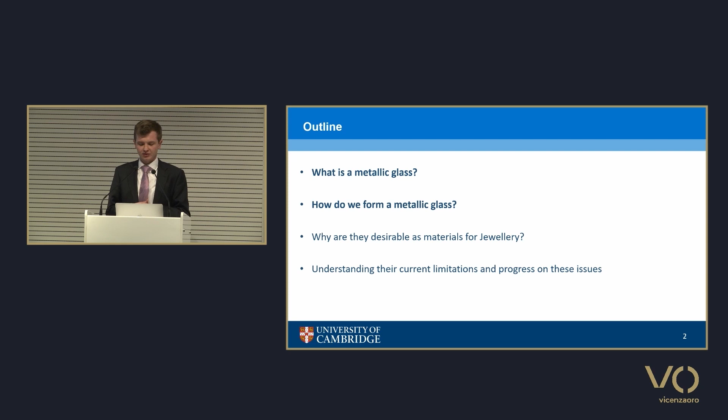So we will first discuss the nature of bulk metallic glasses, building a little on Ulrich's kind introduction, and how they differ from crystalline materials. We will then discuss how metallic glasses can be formed. After this, we will discuss the advantages and desirable properties of bulk metallic glasses as jewellery materials and how they have the potential to deliver new opportunities. And lastly, we will discuss some of the current limitations and challenges facing bulk metallic glasses as jewellery materials and what recent work has been done and what work is currently underway.

As you all know by now, metallic alloys are typically crystalline. That is, all the atoms are arranged periodically throughout space, and we have something called long-range order. By contrast, a glass can basically be described as a hardened, cooled liquid. It has the structure of a liquid, but the resistance to deformation of a solid. It therefore differs substantially from conventional crystalline jewellery alloys. While it's tempting to draw comparisons between metallic glasses and polymers and oxide glasses, such as window glass and silica, we need to be careful because in those structures we have chains of atoms which are entangled together, which is not the case in metallic glasses. It's the atoms that are randomly distributed.

So when we form a metallic glass, we take it from the liquid state and we want to cool it very quickly to avoid crystallization. We can measure these properties using what's called an isothermal time-temperature transformation curve, which I've measured here for one of the gold-based glasses. You'll see two red lines here. The one labeled 2 represents a critical cooling rate that will entirely form a glass. The line labeled 1 is the critical cooling rate to avoid crystallization. That intersects this black C curve, which is the measure of the time for crystallization to occur as a function of temperature. If we cool fast enough, we will reach the glass transition temperature—the temperature at which the atoms are effectively frozen into the glass and thermally arrested.

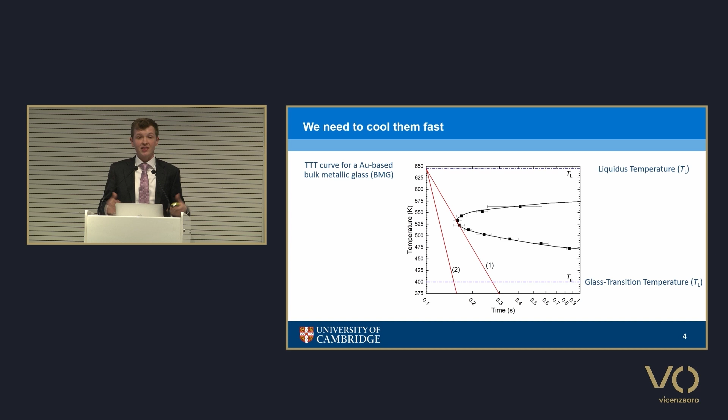So our aim from the previous slide is to push this C-curve as far to the right as possible, and we can do this by adopting several strategies in choosing our alloy. First of all, as Ulrich was saying, we typically choose eutectic compositions, where the red line intersects the blue line. That means our liquid is as stable relative to the crystal for as long as possible, so the temperature gap between here and where the glass transition would be is as small as possible.

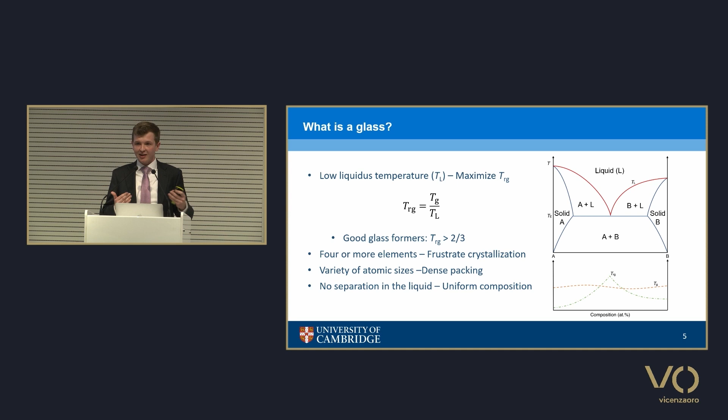Secondly, we will design our alloys with 4 or more elements. This does several things: it ensures dense packing within our liquid, so the atoms can't move around as quickly. But it also means that when it does try to crystallize, there will be many phases trying to crystallize at once, so it's a bit of a mad rush, and ultimately none will crystallize. Those atoms we choose quite carefully—our elements are chosen for varying atomic sizes, which helps promote dense packing. We also want to make sure that chemically they all like each other the same amount so that we don't get any phase separation.

So that's a very quick introduction to the principles of how we form metallic glasses. We will now go into why they are useful as jewelry materials.

Metallic glasses have been used and proposed for various applications, ranging from biomedical implants to space applications. But they're probably most famous for their use in electrical transformers, where they have very low resistance, minimal heat losses. Since the advent of platinum and gold-based glasses by Boonrat Lohwongwatana, and as Ulrich explained, those glasses have sufficient hallmarking standards for the jewellery trade.

There is a wide variety in glass forming ability. As Ulrich was saying, we have this critical casting diameter, which scales with cooling rates. We call any glass a bulk metallic glass if it can be cast in sections thicker than 1 millimeter. So here we've got all various types of metallic glasses.

As you can see, palladium's nice and high at the top, and gold is more towards the bottom. It's worth noting that there are very few silver glass forming alloys, and none of them are near the sterling silver fineness regulations.

We've got our palladium glasses up here, and then we've also got these zirconium ones. For some of you familiar with the watch trade, these zirconium-based metallic glasses have already been used under the trade name liquid metal and are often used in bezels of certain watches.

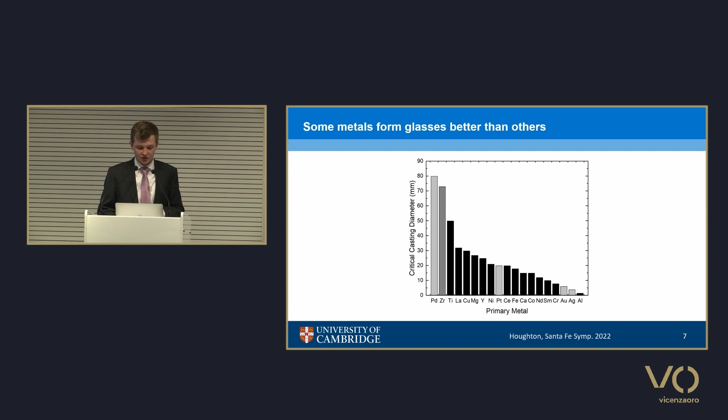One of the main advantages of BMGs is their hardness. Here we've got a chart of different metals, the crystalline alloy and a BMG of comparable fineness. And as you'll see, the hardness is typically at least twice as high. This is due to their atomic structure.

Whereas in a crystal we have layers of atoms that can slide easily over one another, they don't exist in the glass. Glass is actually deformed by a mechanism of shear banding, which I won't go into. But ultimately it means we have very high elastic strains under large loads, so we don't see macroscopic ductility in the same amount, but we do have much higher hardness.

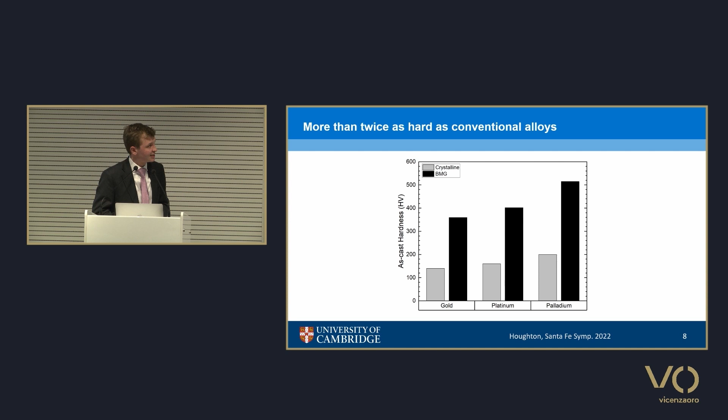Failure here will occur by the shear bands, but that occurs at much higher strains, allowing the ball to bounce as much as it does. Again, we get new design opportunities courtesy of these metallic glasses because of their high elastic properties and the fact that because they're so hard, the gems won't deform the metallic glass.

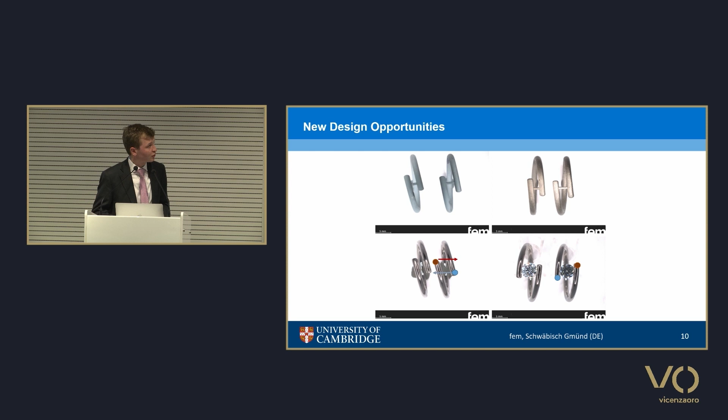In terms of processing, Ulrich talked in great detail about investment casting, but there's also this advantage that because metallic glasses are so much like polymers, there's a process very analogous to plastic injection molding. There's several companies that are able to do this, and the key advantage is time.

As you all know from Ulrich's talk, we have minimal shrinkage on casting, and we have very good surface finishes. So we can actually cast rings in a matter of seconds, as opposed to the relatively long time for investment casting.

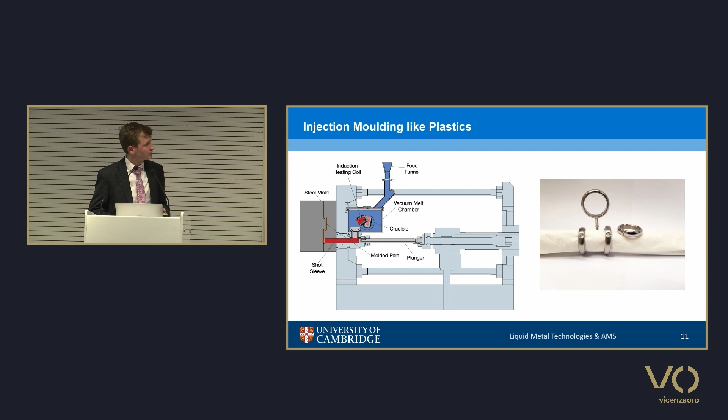So we'll now go on to the current limitations and progress on the issues. As we've already mentioned, we need extremely high cooling rates to form metallic glasses. Not only does this create issues with actually forming thick sections and forming glasses in the first place, it will also create many issues with form filling, so we have to be careful about the design of our castings.

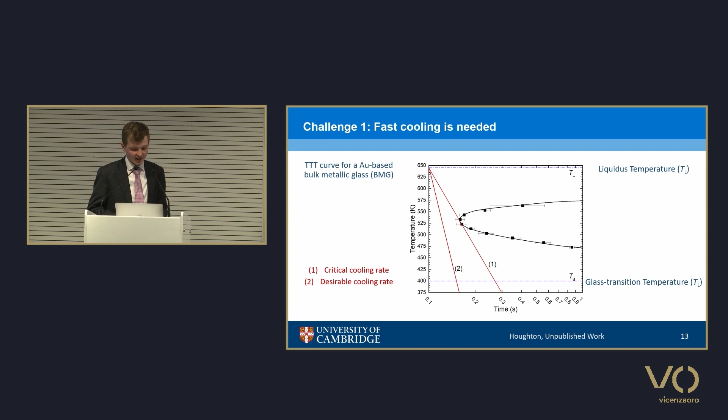But for our platinum and palladium systems, we're right at the cusp of this 950 hallmarking fineness. The large issue comes from considering that, given we need about 15 atomic percent metalloid or other additions to form a glass, we can only be using a certain range of light elements.

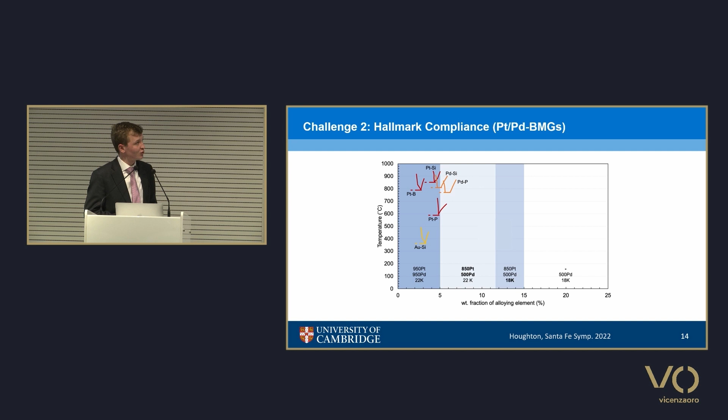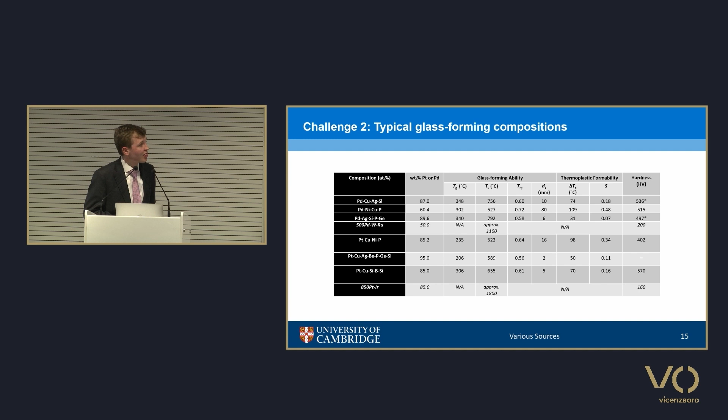I show a table, which is perhaps some of the figures you may have already seen, but you'll see that as we go to our higher finenesses in our platinum and palladium systems, we typically have an issue with critical casting diameters dropping off markedly. These ultimately mean that they're of little commercial use at the moment. We also see a drop in this thermoplastic formability, characterized by this S value here, and that's of importance for the injection molding analogs.

So we now move on to the issue that Ulrich didn't concern as much, and that's in these white gold alloys. The alloys are white in general because of their high silicon content, but unfortunately these alloys tarnish abnormally fast.

So this is a sample, a white gold ring that's just been worn for 52 days, and as you can see, there's a dramatic tarnishing phenomenon going on. Extensive work has been used to characterize these systems in general, and the tarnishing mechanism is widely understood.

When we cast these alloys in air, we generally get a crystalline silica layer that forms on top, and that is passivating and stops tarnishing from occurring. But with polishing and general wear, that surface layer gets removed, and then we see this tarnishing phenomena start to occur.

The first behavior to occur is outward diffusion of copper from within the glass, which is able to oxidize the silicon that wouldn't occur otherwise at room temperature. Ultimately that leads to structures that aren't quite dendrites—since they're not crystalline we call it dense branching morphology. In essence, we have inward oxidation of silicon and outward depletion of copper, which leads to a reddish-brown appearance on the surface.

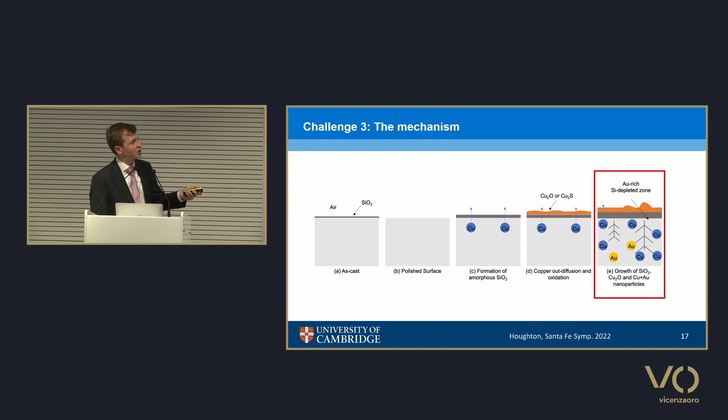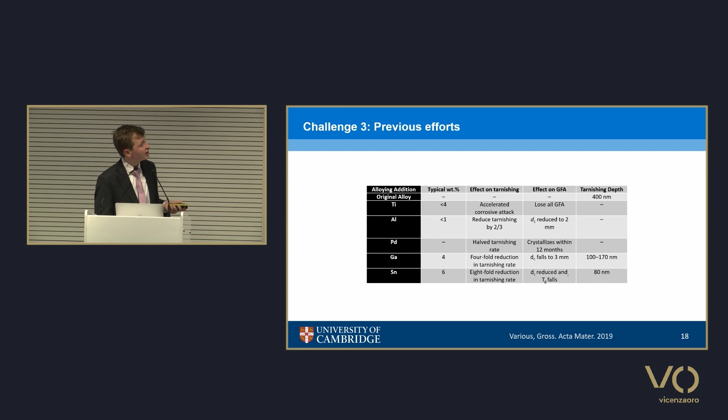So what might we do to solve this? There have been many attempts. At first, people started playing with the copper-silicon ratio and removing elements such as palladium, but that tended to lead to a loss in glass-forming ability, so we could only cast in even thinner sections than before.

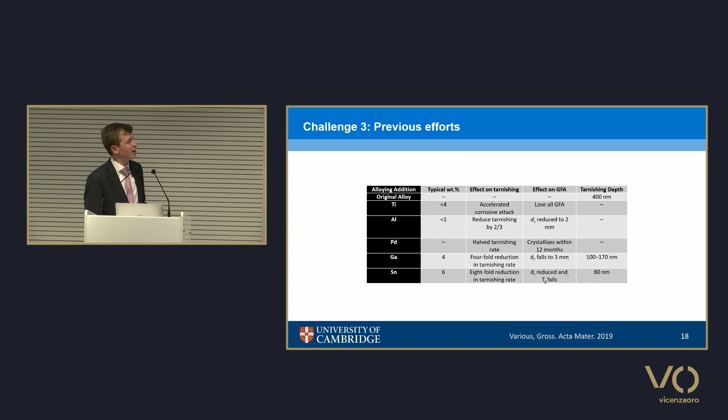People have tried adding other elements to stop the tarnishing behavior, and generally we see some improvement—this is the tarnishing depth of the corrosion scale shown schematically here. You see some improvement, but ultimately also a drop in critical casting thickness.

Perhaps the best achievement to date is by Oliver Gross and Nico Neuber. They took the Schroers alloy—sorry, that's actually their intermediate alloy—and were able to get down to tarnish scales of this value, which are much whiter than they would be otherwise.

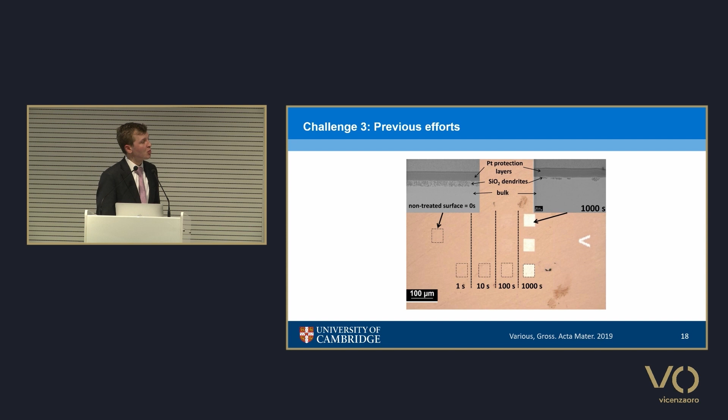But unfortunately, they had to use an effect called ion implantation, which requires a gallium ion beam and is of limited industrial use, largely because wear will remove that surface layer, and it's very difficult to do on non-flat surfaces.

During my PhD, we took a slightly different approach. Rather than working on high glass-forming alloys and improving tarnish resistance, we went right back to the start and considered all the elements in the periodic table and which ones would be glass forming, using the principles outlined before. We identified good glass forming systems and then tried to improve glass forming ability from there.

As you can see, in the Schroers alloy we have a tarnishing depth of about 400 nanometers, and in our newly developed alloys we're down to about 80 nanometers. So we're largely close to a commercially viable alloy.

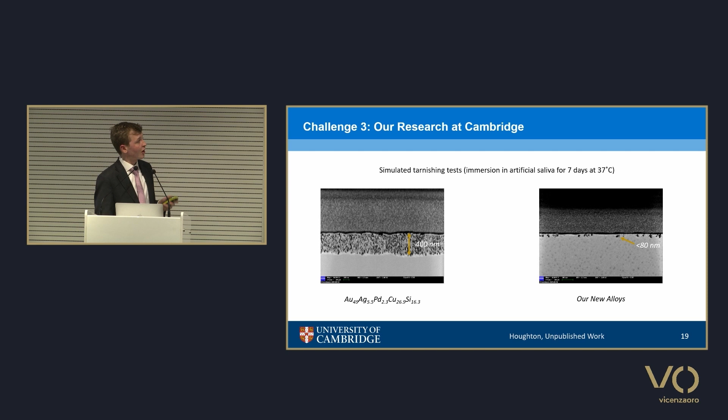Other work we're doing is in partnership with Ulrich and colleagues at FEM, looking at wear behavior. It's generally understood that wear resistance would scale with hardness—that's known as Archard's law. But in a recent publication by Ulrich and Lisa at FEM, they found that's not so much the case.

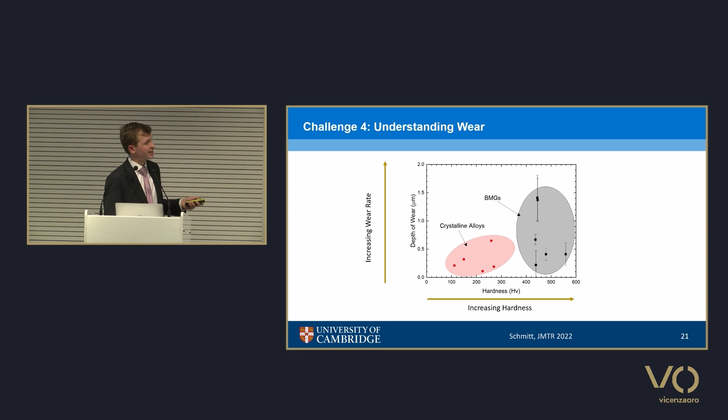So BMGs might not perform as well as first thought, and there's some quite fundamental work to do to understand that. Using the extensive testing and characterization facilities available at both Cambridge and FEM, we're hoping to understand this phenomena to make more industrially viable alloys.

In conclusion, we've come quite a long way in metallic glasses. We started off in the gold system in the 1960s, over at Caltech, and in the 60 years since, we're almost at the point of hallmark-compliant bulk metallic glasses.

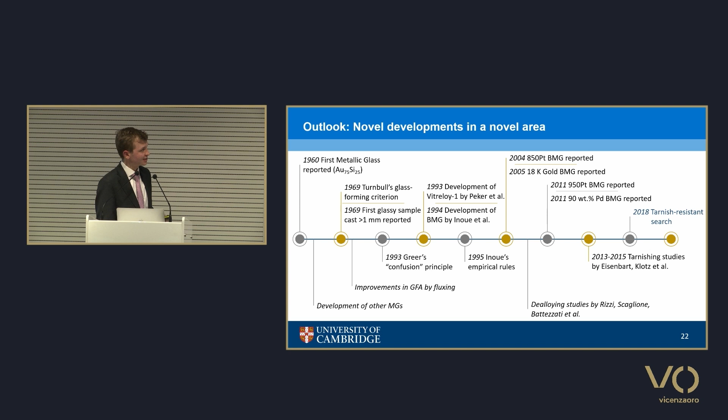Going forward, we've got harder and hopefully more scratch-resistant alloys in many cases, but not all. There are new design opportunities, and also the case for faster, higher definition production that could rival technologies such as MIMs. Unfortunately there are still challenges to go, largely around developing tarnish-resistant compositions, achieving high glass forming ability with high fineness, and understanding the wear phenomena.

So I'd like to thank you all for listening.